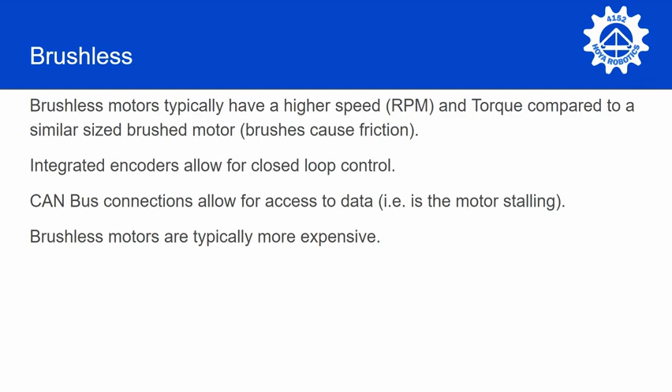The CAN bus connection allows us to access data. So, for example, if the motor is stalling, the amperage will spike, so we can build logic into our program to be able to easily tell what's happening, to make sure that we don't burn out our motors. The problem is they are more expensive. But when you add motor controllers into it and encoders, the price is not that hugely different in that situation. So the first motor we're going to talk about is the Kraken.

So the Kraken is sold by West Coast Products or Cross the Road Electronics, and the links, if you go to the slideshow version, will take you directly to the page showing you them. And here we can see the Kraken motor curves. So it's got 7.16 Newton meters, and so that's a really high value. It's got a lot of torque, and at 6,000 RPMs, it's a very fast motor. So this is one of the really powerful motors that we use.

You can see with the shaft, it's got a spline for the shaft, and we've got a variety of mounting points that we can use with it. So I'll just put on the laser pointer so that you can see the shaft and the mounting points. And so these curves are really useful. Basically, if you look, this is the power curve. That peak is your sweet spot. So you can see here it's about 3,000 RPMs at that.

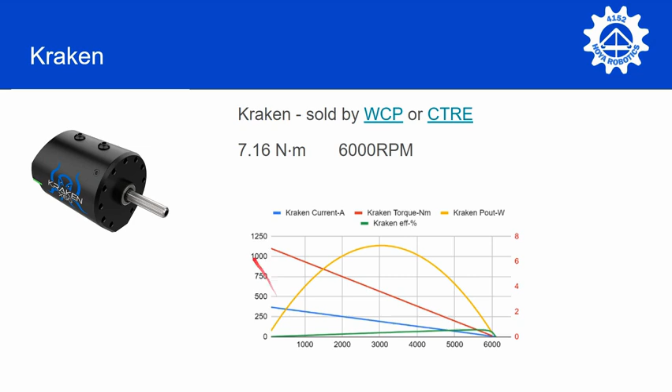You can also see the current, and you can see the current can spike up here. So realistically, if you're going to be running it, you're going to be running it at a slower speed, and not have the amount of torque, just so that you don't spike the current and have the breaker blow. So those are things that you want to consider when you're deciding if a motor is useful or not.

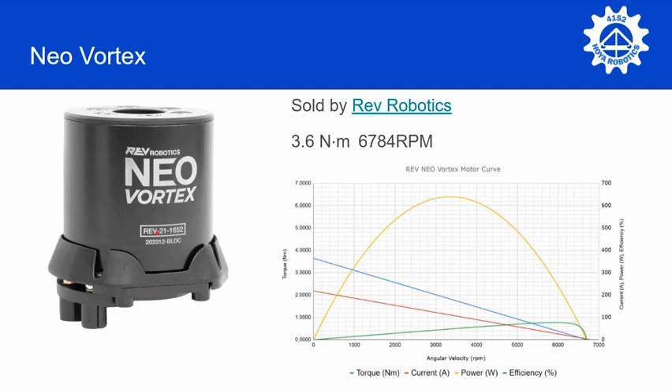So the Neo Vortex, this is Rev's motor that is kind of comparable. It's a little bit faster than the Kraken, but it doesn't have the same amount of torque. And again, you've got a motor curve that you can use to refer to it. The real advantage of this particular motor is that you can have the shaft go through it. That allows for it to be packaged really nicely. We used it on our intake, to be able to mount the intake really effectively for the 2024 robot. So there's some real advantages to that packaging.

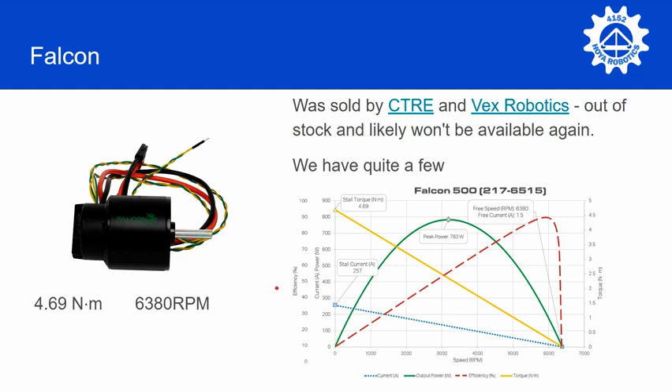The Falcon motor, I believe that we won't see this for sale anymore, but we do have quite a few, because we used them on our swerve when we did swerve for the first time. So we're still in 2024. We used 4 of these for the steering of our swerve, and then we used 4 in other locations. Very strong, high quality motors, so we'll probably be using those for a few more years till we eventually can afford to replace them with Krakens or Vortexes.

Neo 550, it has the same cable issue that the Neo has. The advantage of this particular motor is it's really, really tiny. So we used it, for example, in our 2023 robot up at the top so that it was very small weight. And the packaging worked really nicely for it. Again, I'd like to avoid using it because of that cable.

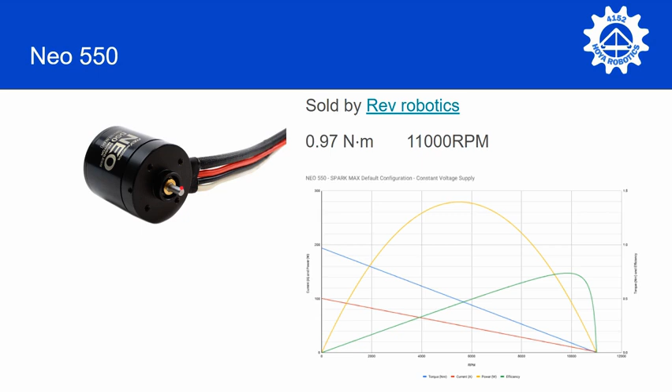We're going to probably use all the ones that we have for a mini swerve project so that we'll have a mini swerve that we can practice programming with and not have to worry about the risk of that cable coming disconnected in a competition robot. Really high speed, but much smaller torque. And you want to be careful with this. It's got a very small shaft, so you want to make sure that whatever you're mounting on that, there's not going to be a lot of force on that shaft because that is a considerable weak spot compared to the much thicker shafts of other motors.

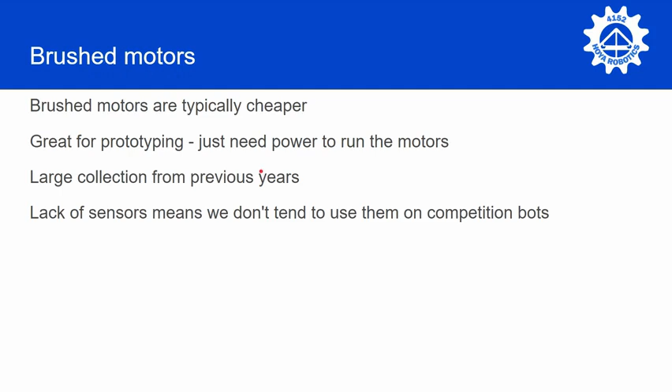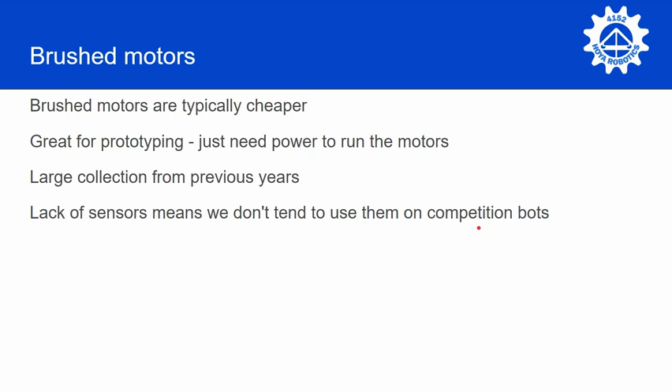Now, ideally, we will use brushless motors, but there is a place for brush motors. The biggest thing is they're typically cheaper. They're really good for prototyping. So we've got a lot of them from previous years, and it's nice because you can just stick it up, connect it to a power and boom, it runs. The biggest problem is we don't have sensors integrated into them, so that's one reason that we try not to use them on competition robots. Having said that, there are places where we could still use them where we don't need to get that feedback. So there could be a use.

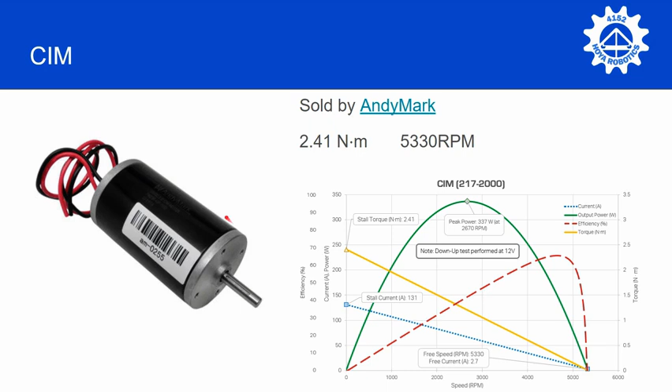The CIM motor, this was the workhorse for years and years. So this shaft, the 8mm shaft with the keyway, it's the same shaft that you find on the Neo motors, and the mounting pattern of the 2-inch holes. That mounting pattern you can use with the Kraken, the Vortex, the Neo. So it's kind of a standard with it, but it's very big and heavy compared to the Kraken or the Vortex, and you're just not going to get the same output, and you don't have integrated sensors. So use it for prototyping, use it for class projects, but we'll probably not use these on competition bots.

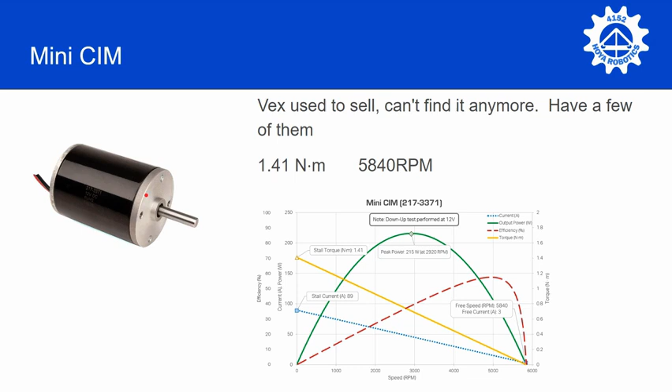Same with the mini CIM, a little bit smaller than the CIM motor, so a little bit faster, but not the same torque. And again, we probably won't be using any of these. We use them on side projects and things, but as they eventually wear out, then we won't be replacing them.

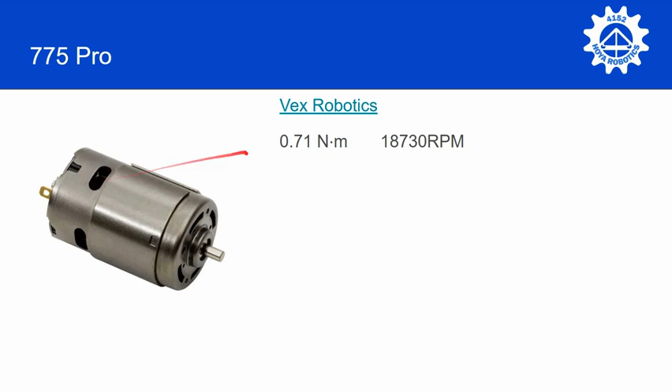Now, the Redline motor and the 775 Pro. These motors are basically the same thing. They're 775 motors. This is the AndyMark brand, and the other one is the Vex brand. I prefer the Vex one because you can get the pulley, you can get electronics already mounted on it. But again, we'll probably not be buying any more of these, but we do have quite a few in stock that are good for prototyping little projects and things.

Really high speed motors, so they used to be used a lot in shooters and things. And if you put a couple of them together, they can work well. The biggest thing is you need that airflow. So when you're mounting it, that is a factor. You got to make sure that you're mounting this and have holes for the air to be able to get through.

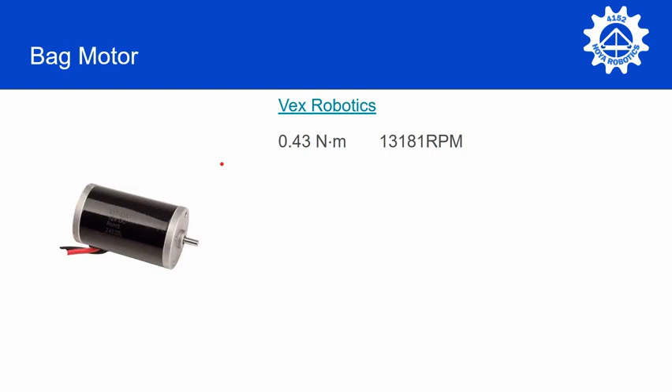Otherwise, it'll heat up, and that's never a good situation. The bag motor, this was a fairly small little workhorse. Basically, the Neo 550 has a similar shaft and kind of replaced it. We got a few of these kicking around, but we probably won't be bothering to buy them.

So there are motor tables available that you can use, and a couple key things I'm just going to go over. We've got our stall current. So basically, if the motor stalls, this is the current that it gets to. The beauty of a lot of the newer motors is that these stall currents mean that the breaker will pop before the motor melts, basically.

So that's a bonus. If you look at some of our older motors, so the mini CIM, for example, or the bag motor, it might start melting before, even though you have a 40 amp breaker, you could be in a situation where the motor catches fire.

So the stall torque, so this is Newton meters. Newton meters is a metric measurement. And if you think about it, how much force does it take to push an object 1 meter? So that's kind of the idea behind it. And the bigger the number, the more power it's got.

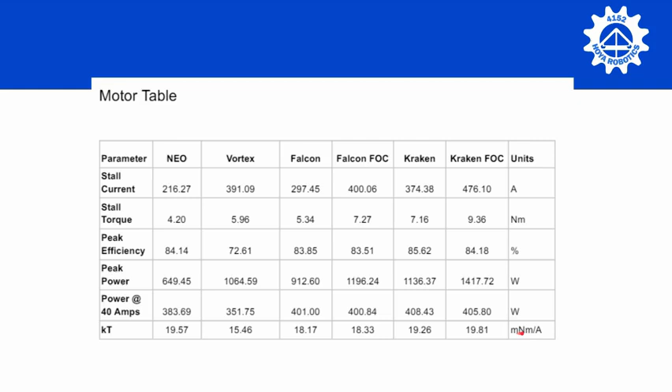So watts is a way, basically, if you look at your amperage and your RPMs, you can calculate your watts. And so that power kind of gives you a framework so that if you're gearing it, you can do a side-by-side comparison of realistically how these are going to compare against each other. And your Newton meters based on your amperage, so your KT.

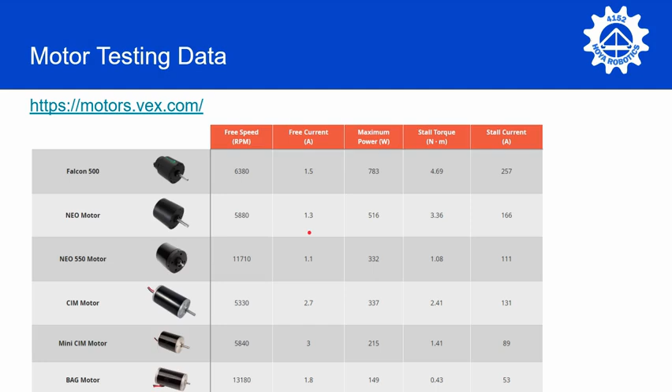So motors.vex.com has a nice table. The biggest problem with this is that the data is kind of out of date. You don't see the newer motors on here. And it looks like there's going to be 2 or 3 new motors coming for 2025. So we have to rely on a lot of data that the companies themselves provide, and we're not 100% sure how accurate it is, but it's close enough to give us a ballpark.

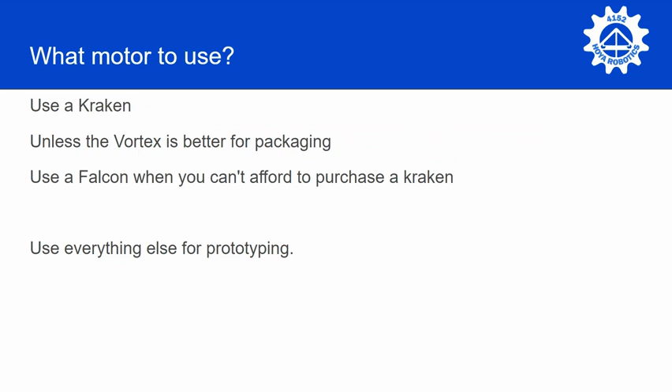So what motor to use? When we're designing a mechanism, basically, let's use a Kraken. That's going to be kind of our go-to motor. It's got enough torque and enough RPM to work in almost any situation that we find ourselves in, so we can gear it appropriately based on that. We really like the wiring, so basically we can set the wiring up so it goes from the motor all the way down to the power distribution hub without any breaks, which allows us to be much more reliable.

So we really like it. The Vortex, there are unique situations where if you put the shaft through the entire motor, that could be really good packaging. So we want to consider that for those kinds of situations. We're going to use Falcons when we want to use a Kraken, but we don't have enough and we can't afford to buy any more. So we'll use Falcons.

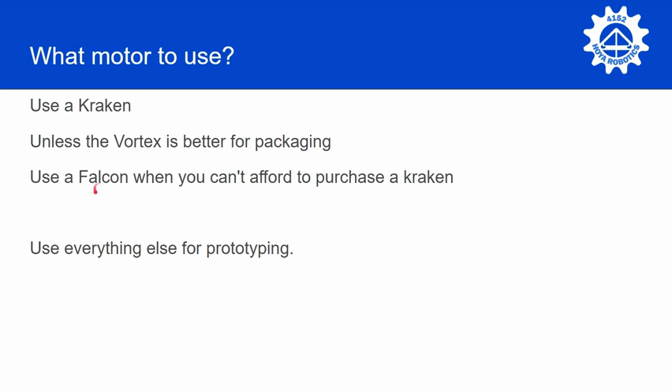Everything else is basically used for prototyping. So the Neo motors are going to be great for prototyping because we can run them from a laptop and we can see what the actual RPM is and everything. So that's kind of what we'll use them for, and then little projects for the other situations.

And the other thing is, how do we know if a motor's going to work? So the first question is the torque. So can it do the work? If you have the torque and you can do the physics calculations, so students that are in physics, they can determine how much torque is required.

If it doesn't work, well, that's where you put in gearing. And so the gearing, let's say I've got about seven Newton meters that my Kraken can produce. It's not going to work for a 14 Newton meter task. And so what I can do is I can gear it so that I've got a gear reduction of 1 to 2. And so basically that will slow my motor down by half, but it will double my torque. So now I'm dealing with 14 Newton meters. You always want to make sure that you provide more torque from the motor than what's actually required so that you've got some wiggle room.

The other question is, how fast can it go? So if you've got an elevator lifting the robot, then you might provide enough torque that it can do it, but it's going to take 5 seconds. Well, knowing that, we can determine at the end game, for example, then we've got to be in place probably 10 seconds before the end. So that's really crucial. And it's finding that balance. So enough torque to make sure that you got some wiggle room, but fast enough that you'll be able to do the task quickly.

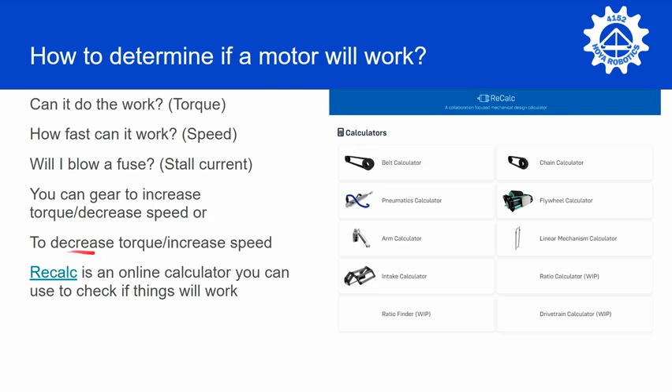The final thing is, will it blow a fuse? So is it going to provide enough amperage that our 40 amp fuse is going to blow? You do have a certain amount of time where you can draw more than 40 amps. So you want to calculate those so that you know you're within your safety margins. So as mentioned, you can use gearboxes to increase or decrease the torque, and torque and speed have an inverse relationship. So if you increase the torque, you're going to slow it down. If you decrease the torque, you're going to increase it. And Recalc is an online calculator that you can use to check if things work.

So servos are a special type of motor. Basically, there's a gearing within it, and you can set it to a position and it can move to that position. We've never used them in a competition robot, but there are some cases where that could be really handy. So we want to explore that in the next year to see if it's going to be something that can be an advantage for our team.

Other factors to consider, so the shaft output. So the CIM motor, for example, has an 8 millimeter shaft with the keyway. So we have CIM motors and Neo motors. They share the same type of shaft, so really, really useful. The Falcon and the Kraken have a spline shaft. Now, unfortunately, both of those have slightly different splines. So if I have a pulley that uses a spline shaft for a Falcon, I can't use that pulley on a Kraken. So you want to keep that kind of thing in mind.

In terms of mounting space, like, what are the physical dimensions with where we're going to put it? Where do the cables come out so that we can make sure that they're not going to get sucked into a mechanism or something? So how things are mounted are really crucial. The other thing is that when things are mounted, can you put a bearing on the other end so that the motor itself isn't getting shifted and stuff.